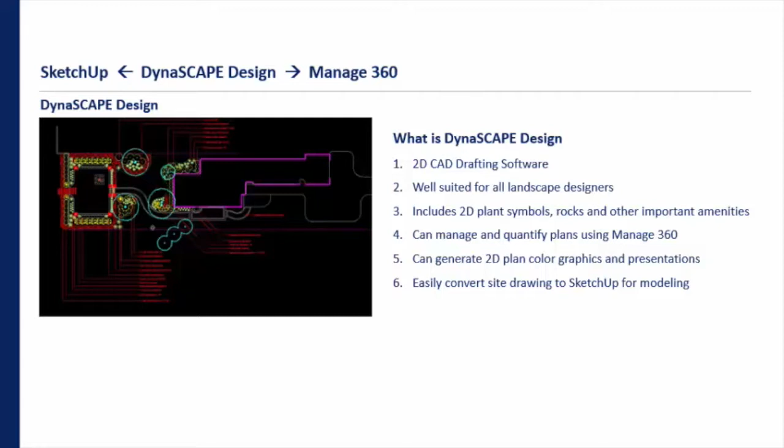And this is how you can quickly quantify and manage your plans to create all the different aspects in Manage 360, and easily convert that to SketchUp models.

So what is Manage 360? It's one of the business solutions that comes with it—a comprehensive business management software. Again, it's specific to the landscape design aspect of residential design, and it includes full sales pipeline management, which Patrick will touch upon in a lot of detail, and also cost-based estimating.

So it allows you, once you start drafting, to really start pulling out your estimating, quantities, and areas, generating those estimates and producing your reports using Manage 360. You can track your work orders, job progress, manage your timesheets, manage your employees, and analyze job profits and losses using the built-in best practices process that Manage 360 offers.

And of course, having SketchUp models coming out—for people in the audience interested in SketchUp and 3D modeling, that's an interesting topic. I talk with a lot of landscape designers and landscape architects doing residential design, and identifying that there's a need, especially for clients or to get ahead of the competition, in terms of using 3D modeling to portray your designs quickly and easily. And that's what SketchUp can do.

It's an easy program up front. There are some nuances to getting it to work for you in a much more proficient way, but it does have the ability to actually create models for you.

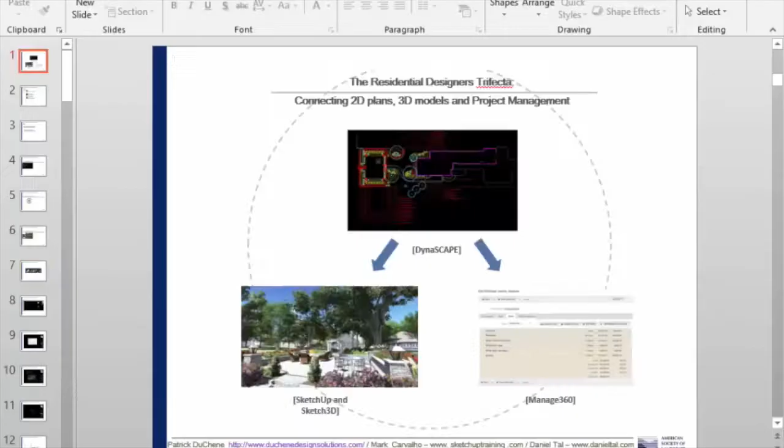Thanks. Hello, everybody. So, DynaSCAPE Software—some of you may recognize it, some of you may not. In the residential design build industry, it is an industry leader. It is a very dynamic software suite, really.

There are several components to it: DynaSCAPE Design, Color, Sketch 3D, and Manage 360, which makes it a very unique software tool for the industry. It allows you to not only design your projects, but to estimate your projects, propose your projects, manage your projects, and figure out at the end where you made your money and where you lost your money. So you can see why it's such a powerful tool in the design build industry, but it can be very well utilized in the landscape architecture industry, which DynaSCAPE is very excited to start becoming part of.

So DynaSCAPE Design, this is where it all starts. It's a CAD engine that runs very similar to AutoCAD. It can import AutoCAD drawings, and it can export as an AutoCAD drawing, DWG. So it plays very well with AutoCAD. If I'm sent an AutoCAD drawing, all the layers come with it. When I send a drawing to an engineer, an architect, or a landscape architect, all those layers go with it too. So it's a very seamless collaboration.

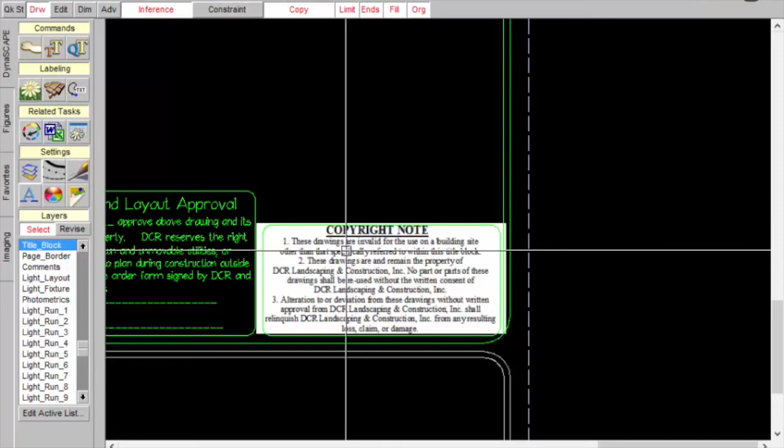So I've created what's called a prototype. A prototype is software that comes with title blocks. You can open a title block, insert logos, any information you want to come up every time you open a drawing, to reduce redundancy in your workflow. For this client, he wanted his certifications, his logos, a customer sign-off sheet for the drawing, which I always had clients sign off on so there's proof they even knew it existed, and a copyright note that says we own the drawing unless you pay for it. So hopefully everyone here is charging for their drawings.

So we can very quickly insert text: client name - let's see if I can spell my name right today - DuChene residence. As you can see, it's populating as I go. So, my address, Reddington Road. It's already set up to populate these. You don't have to; there is very, very little setup in DynaSCAPE.

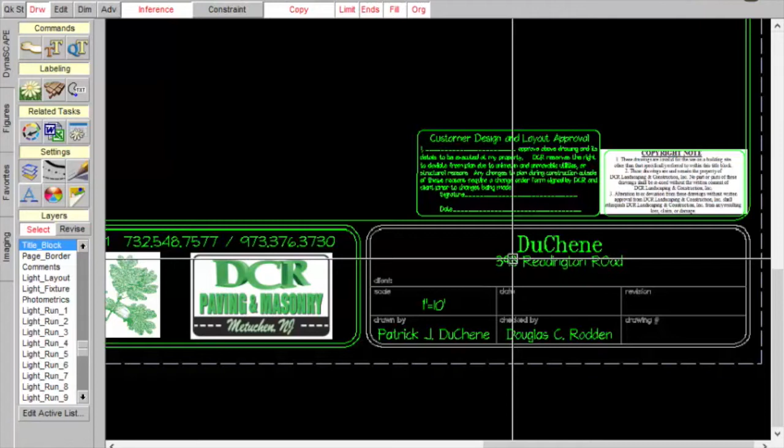Layers are set up already to industry standards. In 10 years of using it, I haven't thought once, 'I need to customize this,' because it's all done for you. If you want to customize, that's fine, but you have to decide how much your time is worth.

So here's the process. I open up my prototype. I have a survey from a client, so I bring in my survey from a well-organized file structure. Here's my survey - it's not to scale yet.

So I want to scale this so I can do one of two things. I can either do quick takeoffs to give a builder sod square footages, mulch takeoffs, or driveway square footage. I'm going to enter a dimension and insert it between this point and that point. So what I just told the software is that between those two points, it's 199 feet.

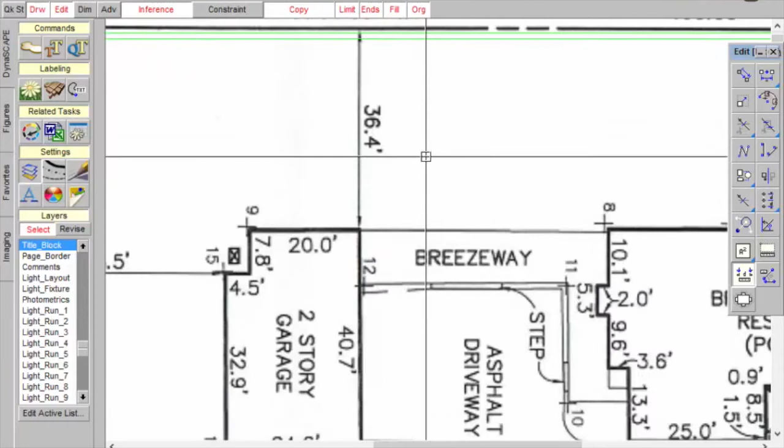If I did my job right, I'll test this to make sure I'm accurate. 36.4 - I'm close enough for presentation purposes, and we're not performing heart surgery. So my drawing is to scale. I'm going to save my drawing so I know where it is - we'll just put it on the desktop as presentation.

At this point I'll go into my layers. I'm going to select my building, just like you would in AutoCAD. Where's my drawing tool? Let's bring it back. I am going to trace everything on my survey that I want to keep. So if I'm not going to keep my walkway, I'm not going to trace it. I'll simplify this building.

So there's the house. We'll go through these steps and put everything on there that I want to keep. Then I will produce a base sheet for myself that looks like this.

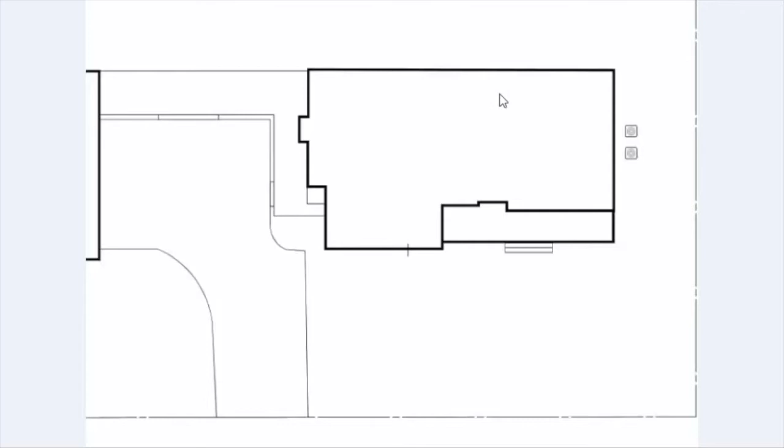Now, this is my workflow - I don't do it all the time, but it's a capability you can use. I'll print this out for myself and do a quick hand sketch with some basic things - I was trained by hand, which probably most everybody in this room was. That's how I get my ideas out quickest. So I'll doodle something, scan it in, and email it to a client to see if they think it's good, which puts me in the right direction.

If everything looks good, I'll bring this in. I'll make this invisible by turning it off, and I'll bring in my sketch. Here's my sketch. At this point, I'll just resize my sketch - I've done this enough to know that back wall is about 66 feet long.

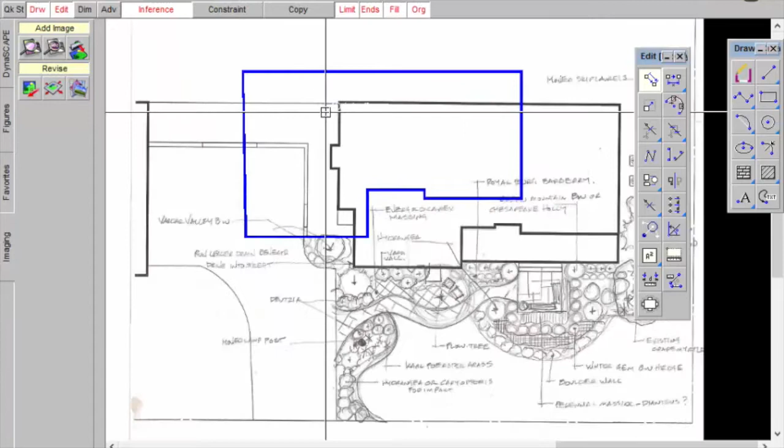So here is my dimensioned house. Now I can start tracing right over my plan. I'm going to trace - I'll float my house over. You can bring the paper into the sheet if you want, or you can do it outside the area. So I can just start tracing these.

Let's put in a couple of shrubs. This is a very dynamic component library - everything you can imagine is in here. Great graphic representation for shrubs, furniture, fireplaces, barbecues, ponds - an incredible amount of components for the landscape design industry.

But since there are a lot of them, you'll just decide which ones you like to use most, just like you would if you're designing in AutoCAD or whatever. So let's throw a few shrubs here - I'm going to cover this one with that figure right there. Let's make these some green velvet boxwoods, so maybe we can assign a 30-inch-wide growth habit.

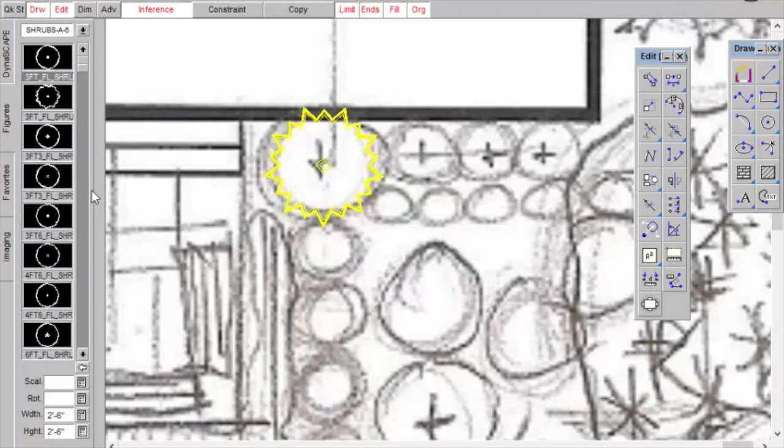Do this at 30 inches. We'll throw this in. They're all preset to sizes, but you can override them. And 99% of the time, that's what I do anyway, just because I really like to know that they're exactly what I want. So we'll bring this, we'll move that back over. Then you can really quickly copy this. Let's send some over here.

And let's throw in a tree. So we'll go to trees, shade tree, trees with no shade. Let's throw this one and let's give it a 15-foot canopy. So 15, 15. We'll throw this guy in here. And let's just give ourselves a square here, which I call the welcome court or the walkway entry.

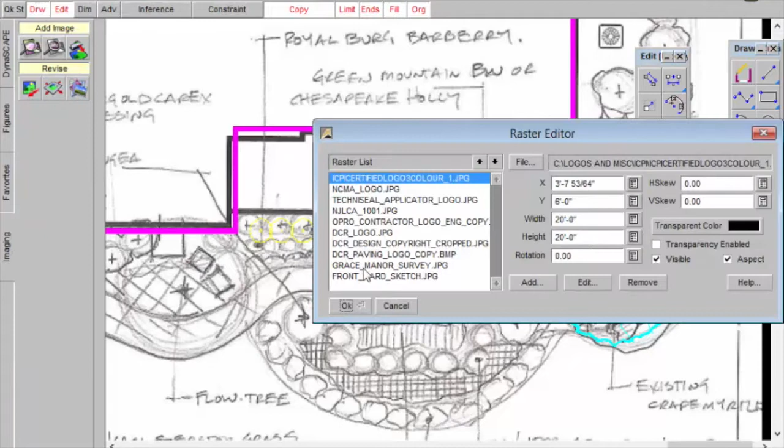Okay, so we have some components and an area that we could color, do takeoffs. So I'm going to make this go away now. And let's just slide this in here and start getting this ready to be a final drawing. So my porch disappeared steps, that's okay.

So now what I want to do is start preparing this drawing to estimate, to label. And if you don't, with the Manage 360 software... well, let's back up. Let's group all the plants together so when we count them, they are all going to populate and we get a good exact count. This is a really dynamic feature.

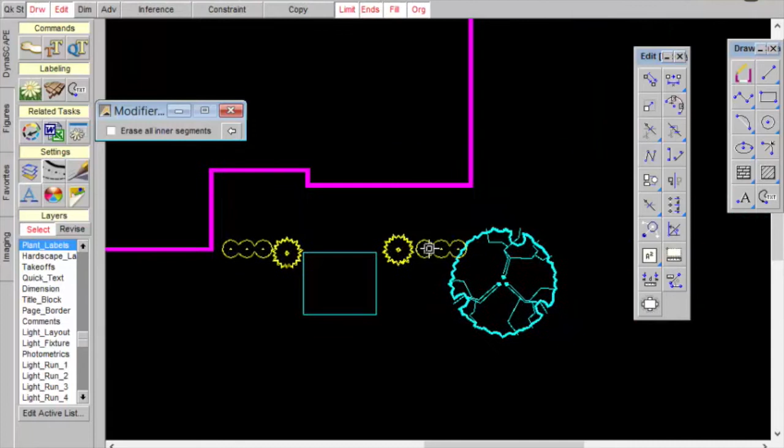So let's make these green velvet boxwood. So when I'm labeling in my plants, this could almost say Manage 360. So if I were estimating out of cost books, and I were to insert green velvet boxwoods, behind that word is going to be information that I've set in the background in the cost books, which would be, okay, a 24 to 30 inch winter gem, I'd probably put maybe 30 minutes of labor, $45 a piece.

So every boxwood that I estimate on my drawing, when it goes into Manage, all that's done for you. You're not counting. You're not goofing around with an Excel spreadsheet like I did for years. So we'll get into that in a little bit.

So without Manage, well, let's type in green velvet. It's going to find green velvet in this humongous database of plant material. It's normally much quicker than this, but we are dealing with a wireless hotspot.

Okay, let me try it one more time. Let's see if we can get to it. Okay, good. Okay, so there's my green velvet. So I'm going to click Go. So as soon as I click these shrubs, boom, they light up, and there are my 6 green velvet boxwoods.

Let's make these a Steeds holly. So let's type in steed. You don't have to type the whole name because it kind of thinks for you. Steed holly. 1, 2, a few clicks. If I want to really be nice and detailed, I run myself a nice guideline.

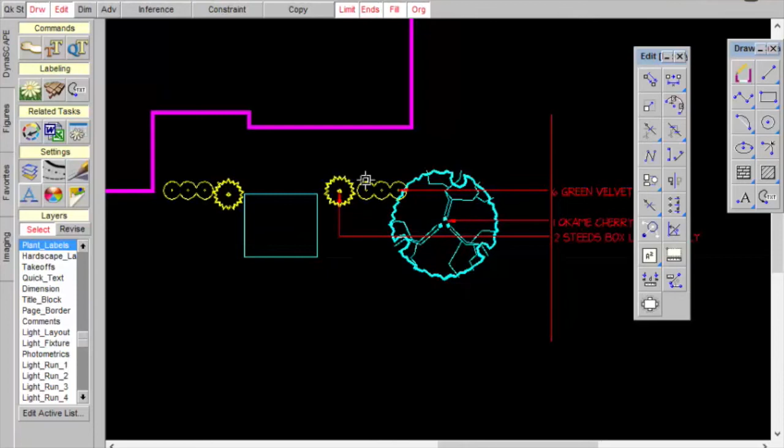Okay, let's make the tree an Okame cherry. Very quick. I didn't have to manually type anything in. The software counted everything. The only time it's going to make a mistake on the counting is if I didn't group things right, if I missed something. But that's why it flashes, so you can see if you missed something.

If you have a larger drawing, we're going to go through and insert all of our plant labels. Then, what do we like to do? We want to put a plant schedule on there. So how do we do that?

There's a really cool little button that says place a plant schedule. As soon as you click it, you can decide what you want to put in there. Botanical, common. I usually don't do botanical because my clients' homeowners' heads will explode if they try to even read botanical names. So let's just stick with common names, size, and quantity. Let's not worry about size right now. As soon as I click OK, you can see what this does.

The system already has default categories of the plant material, so I don't need to mess with that, unless there's marginal plants where it could be a ground cover or a perennial, and you can establish what that is. I'm going to click OK, and I just float this wherever I want. And there's my plant schedule. It's done. At this point, I can click this and export this plant list as an Excel file. You can send it off to your nursery for pricing.

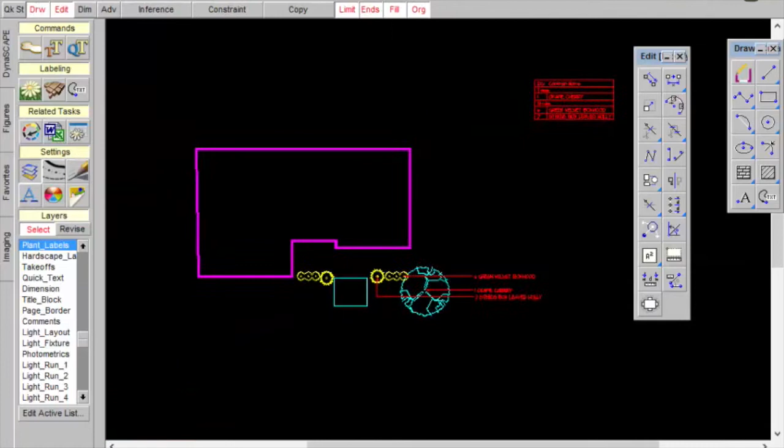So once this is all done, let's put some plant pictures in. So this is where this is not only design software, but I call it design and presentation software because you can really start doing some fun things with this.

So it has a very powerful capability to insert my plants. All I did was click one button, left click, and right click. So now the database is saying, okay, what picture do I have for green velvet boxwood? Or what's their picture that they've supplied?

Again, instantly it would come up, but we're under the mercy. Okay, let's try one more time because it seemed to work the first time. I did it twice.

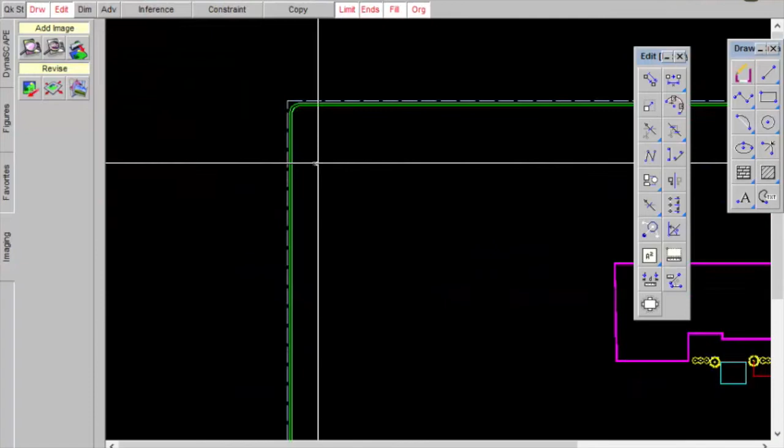Okay, so it doesn't want to cooperate right now, but here's what it will allow me to do. Oh, there it is. That's not a bad picture of a green velvet. So I'm going to insert my image right there. There's my picture with a nice frame with the wording.

If I want to bring in a picture of pavers, I can go into my drawing and insert pictures of pavers, irrigation heads, pergolas, anything you want to showcase, because when you go in for a sales presentation, the less cumbersome it is, the better. So the less stuff you bring with you, the more streamlined your presentation. When you can bring one sheet of paper that has your design, plan images, hardscape images, it's all there. You sit back, relax, let them digest it, and it really speaks for itself.

So we have a drawing now that's labeled plan images, plant schedule. From this point, we can go a couple different directions. If we're not going to estimate it, we'll take it into modeling. Or we can color it, or take it into manage.

But let's take this into DynaSCAPE Color. DynaSCAPE Color is a very easy program. My 6-year-old knows how to use it. Every plant is yellow in her drawings because that's her favorite color. So maybe when she's 8, we'll talk about color schemes.

So let's open that drawing that we just worked on. I'm going to click the button. Everything is great, you can hover over it and it tells you what it is. We're going to go to desktop, and I'm going to click presentation. So here's my black and white drawing as it is right here.

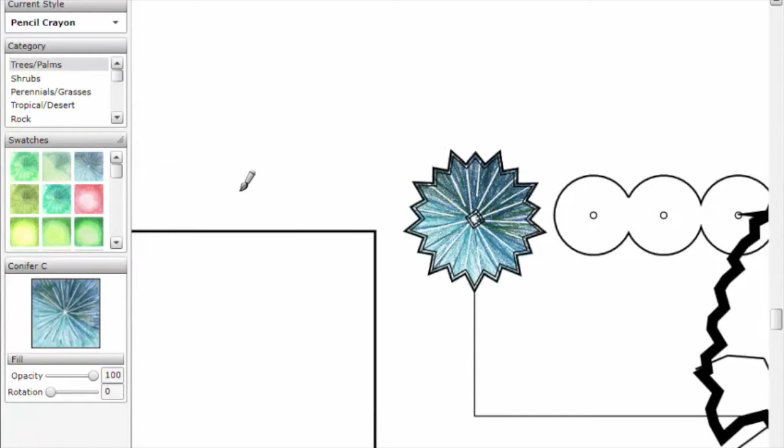Now it's click and color. There are some really neat styles. There's a pencil crayon style that, if you really like that hand look, can color something that looks really neat. I think they had somebody literally do this all by hand using those swatches, so it really is hand rendered.

Marker hybrid is my favorite, where it's a little bit of a mix. Or you can go with a really funky California style, which I've seen some neat drawings with these figures, but I just like to stick with marker hybrid. So just like in design, you're going to find those components that you like to use.

Same thing with color. Every time I do a green velvet or a winter gem, I like to use this right here. Okame cherry, I always like to use this right here. So I'll put this to the foreground.

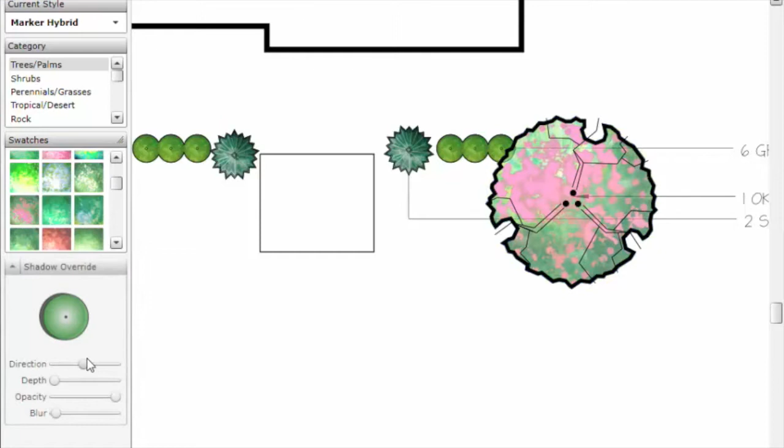Now you can do some really neat things with this. You can play with the opacity of this tree. You can assign shadow angles to your shrubs. I can play with the opacity and the blur, so I can really start giving some life to my drawing.

Let's color in the pavers. All of these are really nice swatches that have been made. There are some real nice paver swatches. You can make your own custom pavers. I made this for the Belgard rep yesterday. You can use that — that's Techo-Bloc, Shale Gray, Blue 60mm.

That's a really awesome way to show clients what Shale Gray will look like next to Harvest Gold, which is a really important thing to be able to convey to a customer.

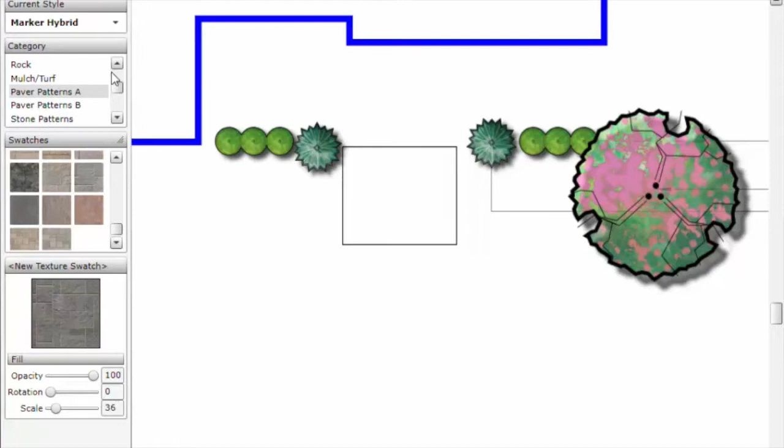Let's just use a DynaSCAPE pattern. Let's color with something like, these are the good ones right here. Let's do that pattern. I can rotate it, make it bigger or smaller. So let's just stick with that.

And my roof, I can either color it with a roof texture, or do something really nice and subtle, like just color it in like this, fade it to the background, and it's a really nice soft look where it doesn't overpower the drawing.

So let's just save this in case the power goes out — presentation, colored. Okay, it's going to save. This is just what happens at trade shows.

So let's start it back up. But it's not a problem. So here's my colored drawing.

All right, so now let's say they decide they want a screening hedge on the left side of the property. It's easy—let's just say maybe it's these trees. So let's scale this up and run a copy of these down.

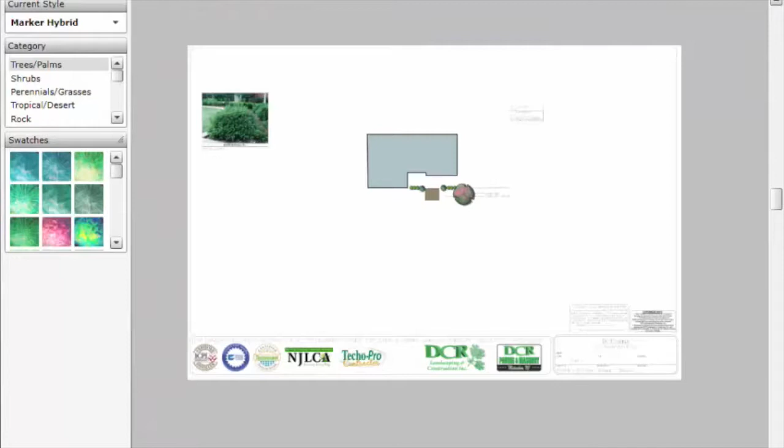This is really cool what I'm going to show you, because before this feature came out, you'd have to manually recolor a drawing every time there was a change. Now you don't have to. All you have to do is click Update Presentation, and it'll ask are you sure—I'll say yes.

And there are my trees. So anything you've added or subtracted—obviously if you subtract it, it's gone. But anything you add to the drawing comes in black and white, and anything that wasn't changed stays the same.

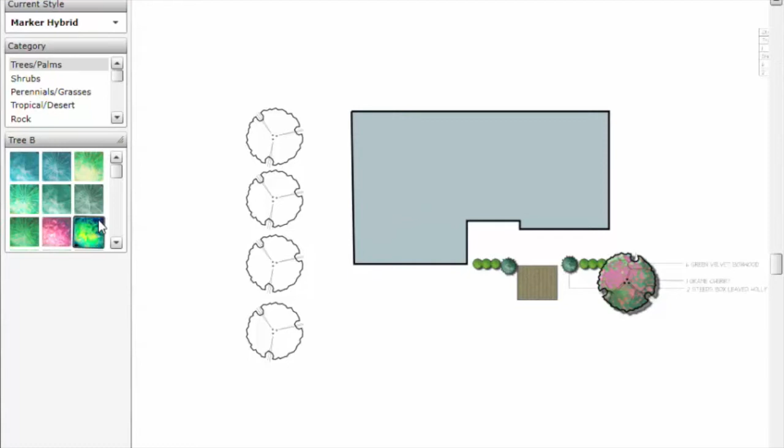So let's make a Japanese maple—that's what I use every time. Opacity, shadowing, whatever. You'll end up with a very nice color rendered drawing that I'll show you in the slideshow.

You can save this as a JPEG or a PDF to send off to a customer. Same thing with design—save it as a JPEG, PDF, or AutoCAD file.

That's color. Everybody here could probably open a drawing and color a drawing, hopefully. Okay, so we're finished with the color rendered drawing.

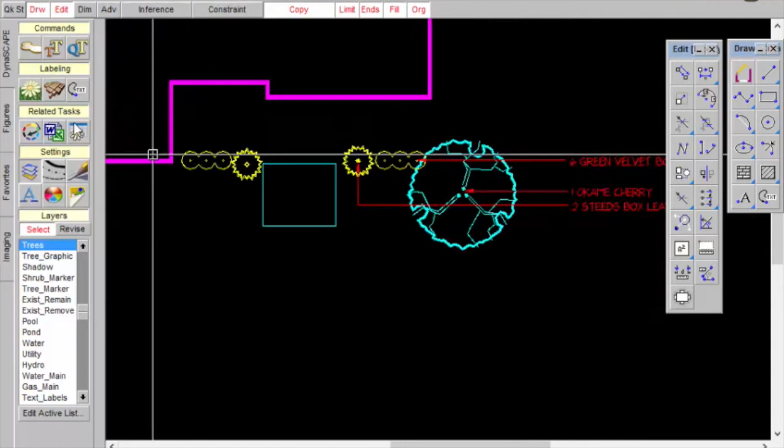That's good. Now we want to take this into DynaSCAPE Manage. Just for presentation purposes, you're also able to go in and start labeling this for hardscape as well, for pavers. So we're going to pretend these are all done out of our cost books, and we have some paver material in here, and some mulch square footages that you label.

Before you send this to Manage, we can set these into what are called work areas. This is crucial—this is a big deal, because when we estimate, most of us are estimating in an a la carte format, where we're giving the front foundation planting, back pool planting, right side screen, back patio, so we can break down prices. That's what a quotation group is, or this could also say work area.

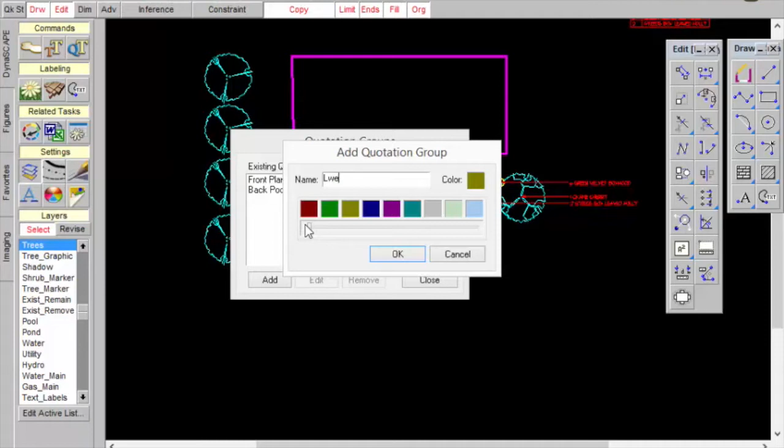So let's remove these and just put them into different work areas. I'm going to add front planting—it's automatically going to color code for me, so I don't need to select colors. I'm going to do back pool planting—this will make a lot of sense when we get into Manage. And let's do left side screening. Okay, now what do I want in my front planting?

Let's put green velvet—I'll left click, right click. It changed color. When you print this out, though, the line weight isn't going to change. It'll still print just fine, but in the program it'll still show in colors.

Back pool planting—let's pretend this is the back pool planting. Left side screening—let's pretend this is left side screening. Okay, we're good, we don't want to do any more. Close, save. All right, what have we just done?

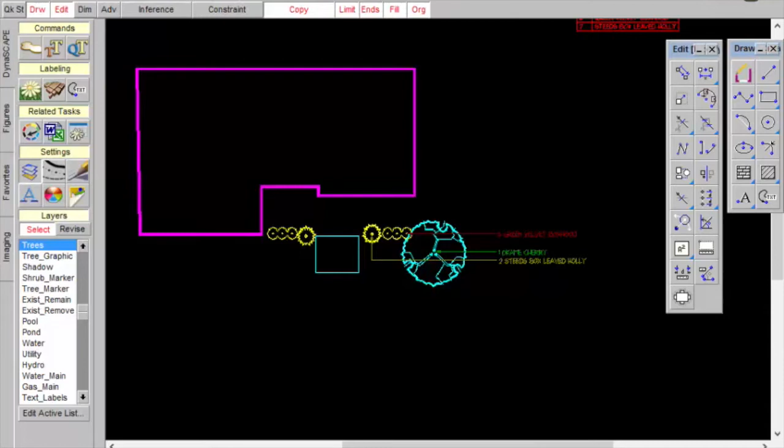What we've done is we've taken all of this information on a drawing—the plants, everything that goes into an estimate—and we've allocated it to a certain part of an estimate. So when that estimate is created, all those things go where they're supposed to go, and you're not having to manually put them there. So I'm going to recap this really quickly, and then we're going to jump into Manage.

So let's click here. Okay, prototype—insert your survey, import your AutoCAD survey if you want. You create your base sheet, print it out, sketch on it, bring it back into your drawing, or you can just get off to the races and start drawing.

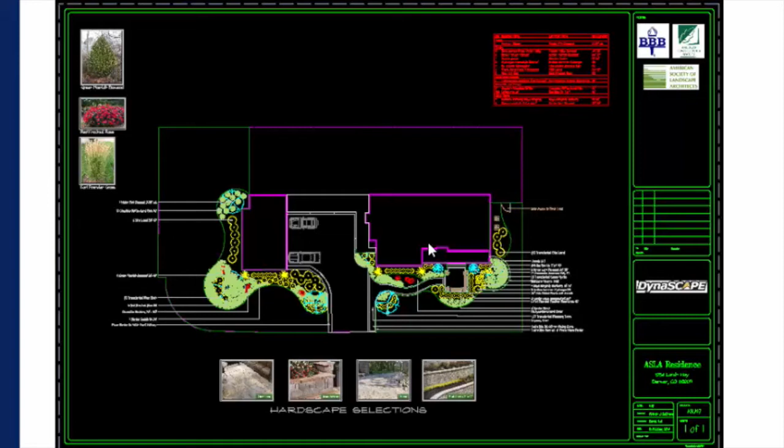There's what it's going to look like when we've done a nice overlay on our sketch. There's what it's going to look like after it's drafted—labeled plant schedule, some plant pictures. There are some hardscape selections there so the customer knows that when a label points to Minicrete or a 3-inch Techo-Bloc, they can follow the line and see exactly what everything looks like, and you're not bringing a bunch of catalogs. So we brought it into DynaSCAPE Color.

There's DynaSCAPE Color. Click and color. So there's a custom texture of pavers, and there's some royal burgundy barberries, which everybody's saying is invasive now, so I probably shouldn't say that word.

There is a final presentation, and I've started putting this kind of nice subtle color in the background because it seems to soften a drawing a little bit. That's my personal preference, obviously you do whatever you want. And there's a really nice close-up. So am I the best at coloring? No, but I think it conveys what I want to convey to a customer.

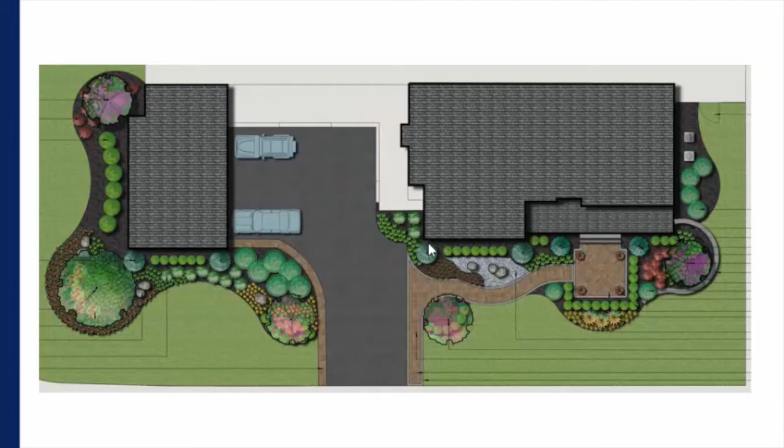In residential design build, clients really like to see what things look like. So if I can show them that the hypericum has yellow flowers and the Caesar's Brother Siberian iris has a bluish purple, I'm going to put those colors in there even though they're not flowering all the time. It really helps them see all the colors. They could care less what the plants look like, they just want nice, colorful, whatever. So it does its job successfully.

There's some flower pots with red flowers in it. So you can really get detailed, nice shadowing on the steps and the little retaining wall. This is a way sometimes to avoid getting into the modeling process when you can show them which way steps are going up and down.

There's our plant labeling with all kinds of different plant material, and there's our example of hardscape labeling out of Manage. So when you're in DynaSCAPE Design, you'll go File, Export, DynaSCAPE Manage File. What that does is bundle the drawing into a DMX file that has all the information for Manage 360.

So when the DynaSCAPE salespeople give demos online for clients, they can take a couple hours. It's an extremely dynamic software program. I don't have much more time to talk.

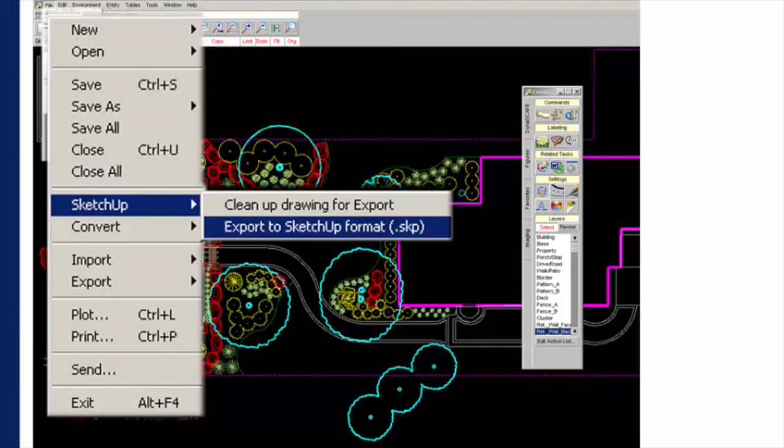I'm going to do this in two different ways, then hand it over to Mark, who'll talk about a couple other processes in terms of modeling. This is what it looks like in SketchUp—we've gone from DynaSCAPE, and it's opened automatically for you in SketchUp.

There's a couple of things that's important to note here. In DynaSCAPE, when Patrick was drafting everything - drawing building lines, fence lines, paving, plants - it's automatically populating all the individual elements onto layers, which is important when working with vegetation in 3D in SketchUp because you really want to control your vegetation layers, especially the geometry. I'll talk about that once you're in SketchUp.

Here you can see the layers in SketchUp open to the right, and the drawing itself imported in SketchUp. So you're looking in SketchUp at a plan view. You can turn off the vegetation layers, and what you really need to do to model in SketchUp is start creating surfaces, then extrude them, then apply colors to them.

The next step is using something DynaSCAPE has created - a CAD to SketchUp cleanup plugin. What it does is automatically create the faces for you from your 2D drawing. So that's the first part.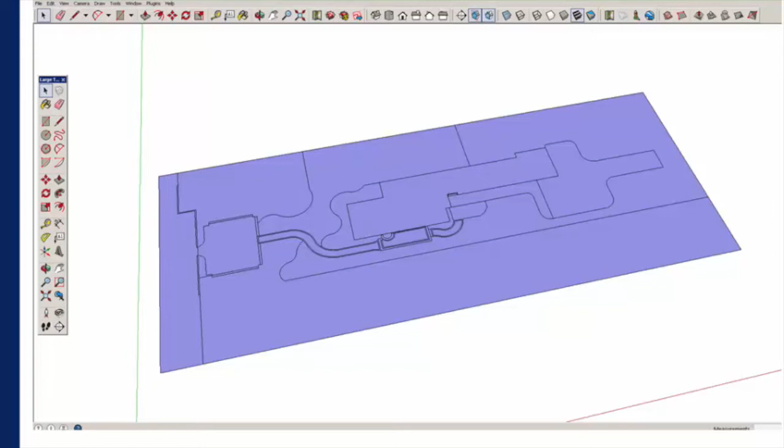Without the plugin, if you just imported the CAD line work and didn't have this extension - extensions are just apps for SketchUp, that's all they really are - it would take quite a good amount of time to actually create all the different surfaces and faces in SketchUp. This plugin automates the process for you.

Next step, similar to DynaSCAPE Color, you're using a paint bucket tool, applying colors to surfaces, indicating what the surfaces might be - from ground cover to lawn to hardscape to the building footprint itself. That's when you start using the tools in SketchUp to extrude volumes. We're not talking about terrain here - we will include terrain as part of this presentation, but here we're just talking about flat surfaces.

One thing worth noting: if you're using SketchUp for the first time, I always encourage people to go model a simple building or house. It was designed as an architectural program, and it's obviously been leveraged by just about every industry, from Cirque du Soleil to interior designers to landscape architecture and landscape design.

One of the things you're seeing, like DynaSCAPE itself, is it has all these preloaded native symbols you can already use for plants, for site furniture. SketchUp does as well, and we're going to talk about that in a couple levels of detail here.

Here the base plan is already modeled. We extruded the surface, we added some rocks to the front end. This was a project that Patrick and I actually worked on in tandem, in Michigan. At this point Patrick's become pretty proficient where he does all this modeling on his own as part of his own workflow.

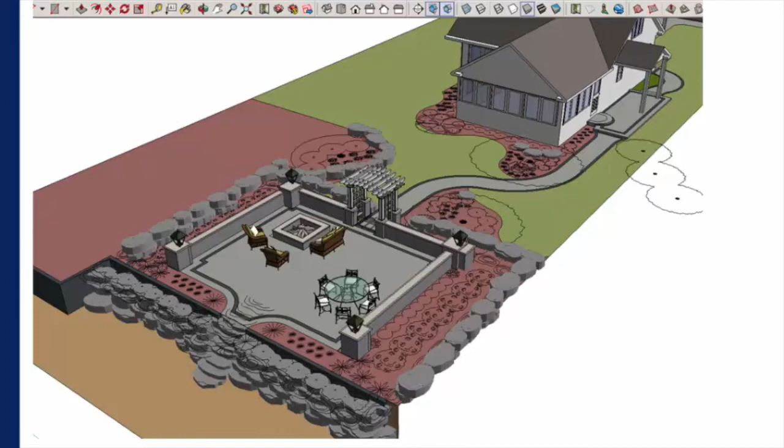Then we simply convert all the plants - you can see all the different plant symbols highlighted in the drawing. And then we're going to use something called Sketch 3D.

This is part of DynaSCAPE as well, another package that comes with DynaSCAPE, and it comes with over 1,100 different plant and components optimized for SketchUp use. The result is we have a planting plan with a rich amount of detail and information in it to give us a nice aesthetic drawing that you can start presenting to your clients. So you've leveraged your DynaSCAPE drawing and Sketch 3D with the SketchUp model to actually create this drawing.

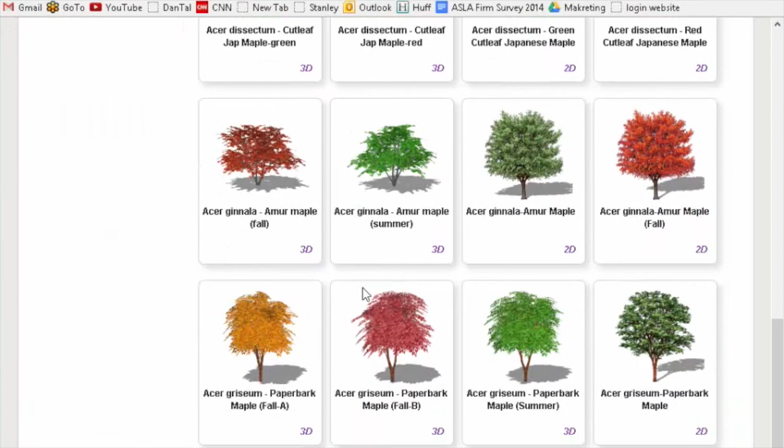I'm going to jump out of here and show you what Sketch 3D is. So this is the Sketch 3D site, on the DynaSCAPE site itself. On the left-hand side, you can see they've created and developed all these pre-made objects specific for SketchUp. This is part of the integration they've wanted to create, going from DynaSCAPE drawings into SketchUp itself. They have botanic names, and there's so many plants, grasses, perennials, different types of shrubs located on this particular list.

So if I go through perennials and grasses, you'll notice some of these have a name that says 2D or 3D. It's just telling you whether it's a 2D plant - and a 2D plant is a picture of the plant.

It's just a flat surface, and when you rotate in SketchUp, it actually follows the camera. Those are optimized, and they look really good when you start doing plant massings. A 3D plant is a fully articulated plant with all the geometry in it, and you can see they have shadows on some of them, giving a nice aesthetic quality.

It goes all the way from vines, water features, fencing. They've even added doors, fireplaces, different types of accessories. So it's a one-stop shop, and this is the difference.

In SketchUp, there's something called the 3D Warehouse, and that's a repository of millions of user-created models. The difference here is these are professionally created and optimized for your use with SketchUp, and obviously targeting the wine drinker community.

Just kidding there. It's just all the different types of vegetation that you can incorporate depending on your region or location. Obviously, when I'm working in Toronto, there's not a lot of palms, so this is very useful in terms of how that works.

Part of the Sketch 3D - so there's SketchUp, which is the software, and then there's Sketch 3D, which is just the name for this particular library that DynaSCAPE has developed. I just want to make that distinction because it can get confusing with all the Sketch and 3D, the DynaSCAPE color.

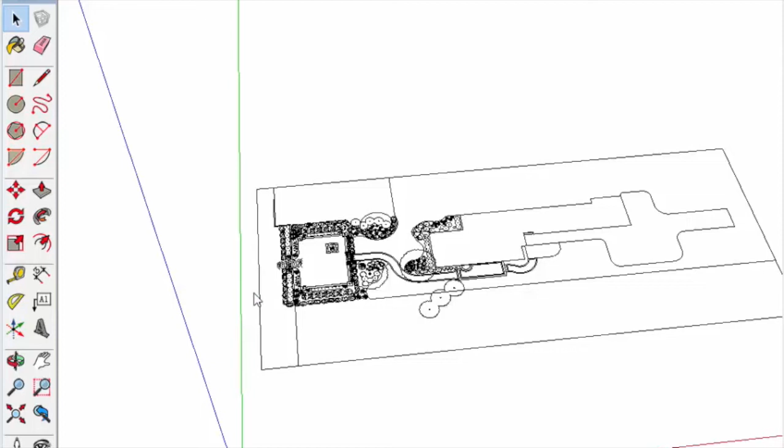So going into SketchUp itself - here's the SketchUp drawing that came in from DynaSCAPE. When you go through the import-export process from DynaSCAPE, it will ask you if you want to automatically open your DynaSCAPE drawing in SketchUp. Here you go, and you can see all the plant symbols and everything came in from DynaSCAPE into SketchUp.

Just to open up the layers - you're not actually creating these layers in DynaSCAPE. When you're drafting correctly in DynaSCAPE, it's automatically doing that for you, which makes it very efficient in SketchUp because you want the ability to manage and control all these layers. And you could start turning them off to actually get to the drawing lines themselves.

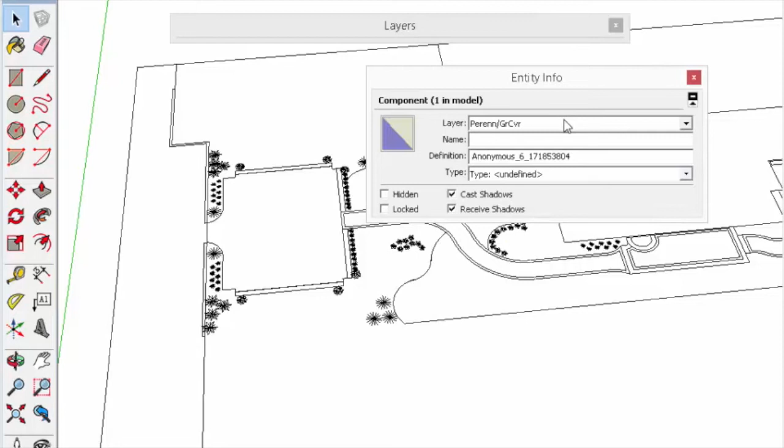Just going to quickly show you - you have some other information in SketchUp that lets you identify what these objects are, similar to what you can do in DynaSCAPE, leveraging that information. So it lets me turn that off, and now you can see I have my simple drawing and plan in SketchUp.

So the original way that you would create a model out of this drawing from an AutoCAD or DynaSCAPE plan is to start drawing all these additional lines to create faces. It starts getting a little painful if you're doing this process in an unformatted way. It would actually take me probably an hour, maybe a couple hours, to create all these faces.

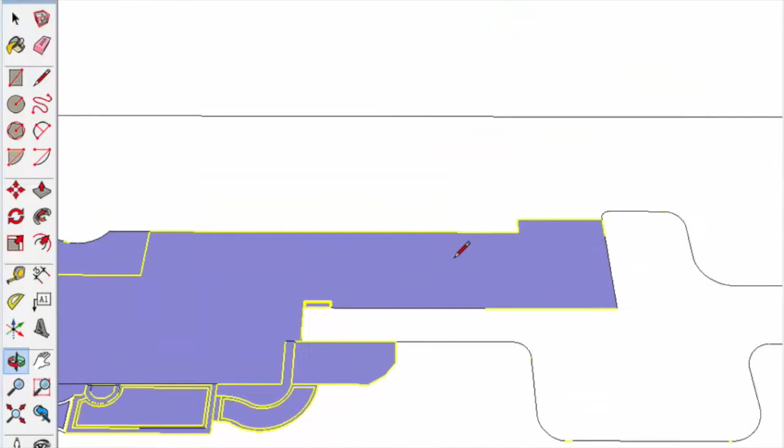I'm going to click on DynaSCAPE Tools, run CAD Cleanup, and what it's actually doing for me is cleaning up the drawing. Sometimes it's not perfect - you do have to go in and start cleaning it up a little bit more.

I was told if I was to demonstrate this entire process, I'm boring, so I'm not actually going to do every aspect of it here. I'm going to go on to the next drawing. It doesn't take long to actually fix this process, and this is part of the educational process of using SketchUp. Instead, I have all these pre-made drawings here, very simple in SketchUp.

You can take the paint bucket tool. This is the large tool set on SketchUp. And just as a note, if you're coming to SketchUp for the first time, these are most of the tools that come with SketchUp out of the box as a native tool. One of them is the paint bucket menu.

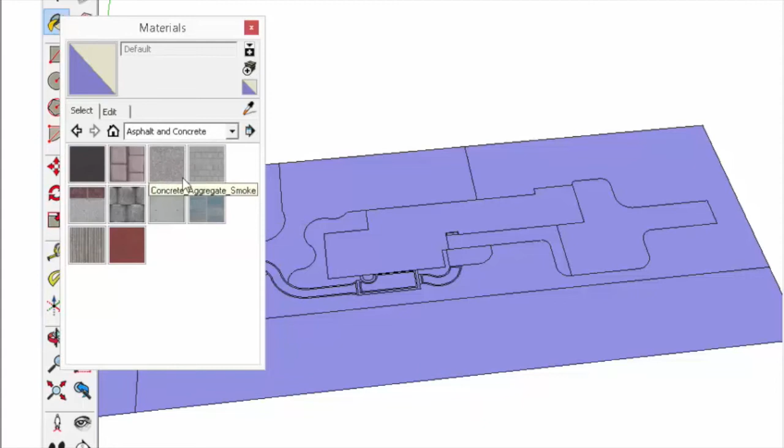I can start going through a materials menu here. I can select from predetermined colors and objects, again, similar to DynaSCAPE color. So in this case, I might select asphalt and concrete and start applying those colors.

And hopefully I'm doing this correctly. This was Patrick's plan, and they can be hard to interpret. Just kidding. He's like, thanks.

And apply these colors all the way around to what you need. And then the next thing you'll start doing is actually starting to extrude all the different surfaces to create your objects that you want to in SketchUp.

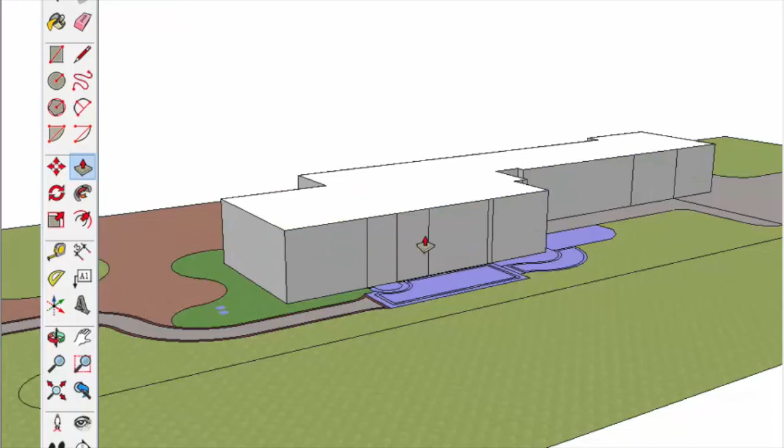So for example, here's my building. I'm going to extrude it up 10 feet. So that's using the push-pull tool, very simple to do. And for a lot of cases, you don't need to create a fully articulated actual drawing to the fullest accuracy that you want. So there's other plugins that you can use.

This one's called Instant Roof. I can select my roof, and this is an extension that doesn't come with SketchUp per se, but that you can go obtain. And I can quickly select from a predetermined number of roof styles. I'm going to select one called Hacienda, click on Make Roof, and it will automatically generate the roof for me.

I can even go in there and add another level of detail to this. Adding the detail. And this is part of the automated process of working in SketchUp to work with it in an efficient manner. So that's really the general purpose of how you're working with SketchUp.

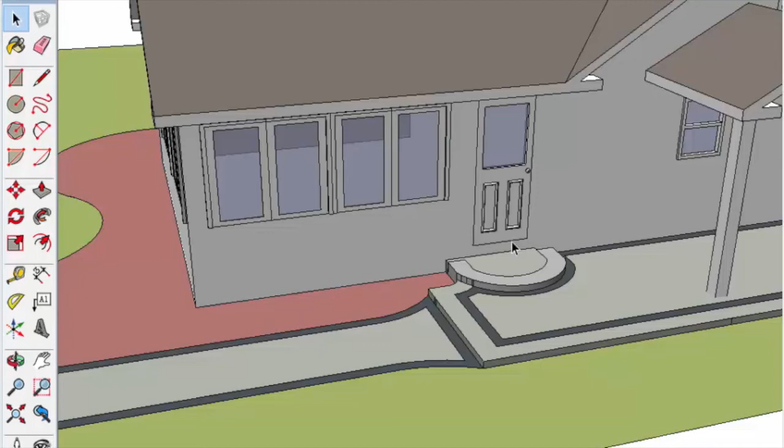I'm going to show a couple of more drawings here. So here we have the next set, the next iteration. The building is done. We've started to extrude the walls. We have all the colors inputted and placed on all the different surfaces. Our steps, again, we're not talking about terrain here, but you can do terrain modeling in SketchUp, and there's a couple of different ways to do that, and Mark will actually demonstrate that in more detail.

And then the next step is adding the next level of detail. And what I tend to do when I go through this workflow process, I do the vegetation last. That's the part that might be changed, while the hardscape is really the part that you need to get nailed down first. It's going to be the part that's the most unmovable, versus the vegetation and some of the stonework and rocks that you're going to put in and add later.

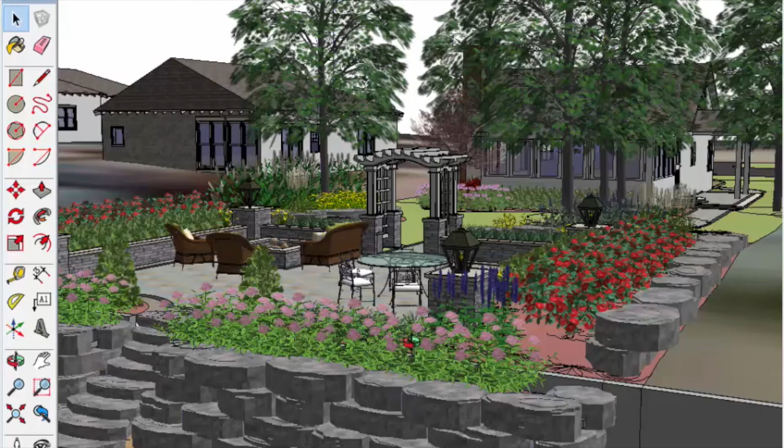So you can see I have all my furnishings, and again, everything is still tied into this layer system in SketchUp that allows you to control and manage how it looks. And then the last drawing really is once you have all the vegetation added in SketchUp, you have your completed drawing. And that's really the general process.

Now, one thing to note, why I use layers in SketchUp, and this is just an important thing if you get into this process, with all this vegetation visible in the model, SketchUp starts to slow down a little bit. That's when you can start turning off all the plant layers, and SketchUp will speed back up. And there's a workflow and process here that's useful in terms of how this can work.

And ultimately what it means is, once you have all your vegetation in there, you start exporting your images, and then you turn your layers back off. And that's really, in a nutshell, this is the general purpose and how you can use SketchUp.

I'm going to turn this over to Mark. I'll switch seats with you, and Mark will go through additional information about how SketchUp works. Okay.

Right, is my microphone loud enough?

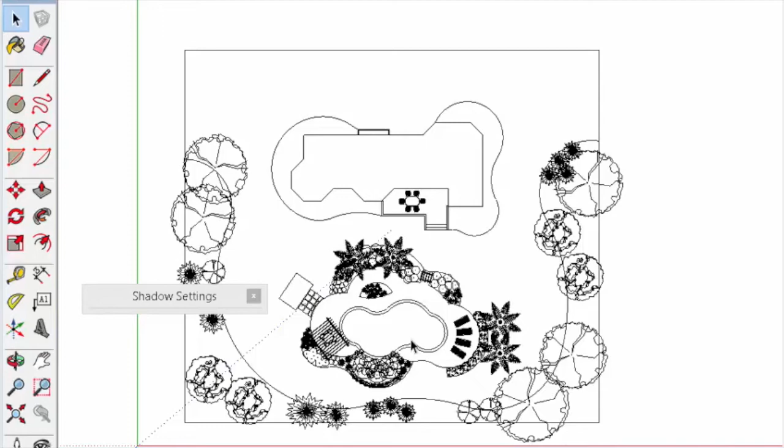I'll just touch on some of the things Daniel said. Here's an example of another plan. The line work comes in from DynaSCAPE - it's actually 3D, you can orbit, but right now it's just line work. Let's look at other things we can do with SketchUp to improve our communication of our DynaSCAPE design. Here's an example of using it as just a plan view with notations.

In SketchUp, you can notate your plant materials as well. It's going to list them by name of the component. What do you call them in DynaSCAPE? Figures - so it lists the figure by its name. They're called components in SketchUp. I've added shadowing to it, so you can turn it on or off. Really all that is a cheap little parlor trick, and I'll show it to you.

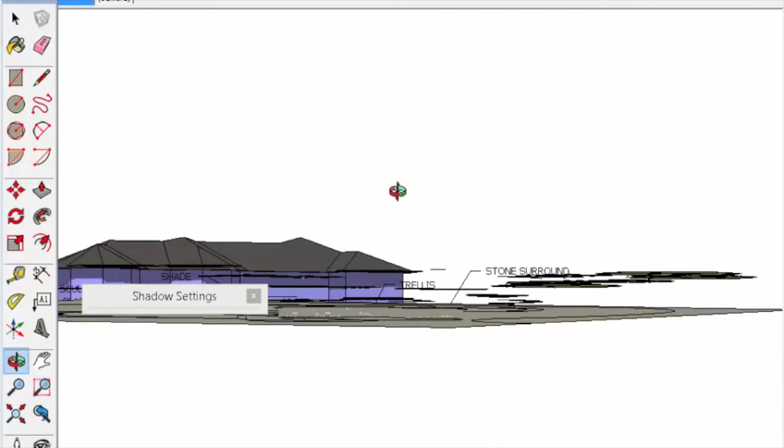Here's an example of using it as a colorized version. This is just SketchUp, so it's a different form of colorization than DynaSCAPE color. What I did was bring in each of the DynaSCAPE symbols, put faces to them, and colorized them. The shadowing, if I turn it off and on, is really just a parlor trick. They're still 2D images, floating above the plane, and the height you give it gives you the depth of the shadow you'll see. So that's a way to play with the concept of 3D using 2D, if you will.

Daniel talked about how these symbols are directly out of DynaSCAPE. I'll right click and reload one of them. So there's the king palm, for example. You can take the 2D file and turn it into 3D very quickly. So you can mix and match.

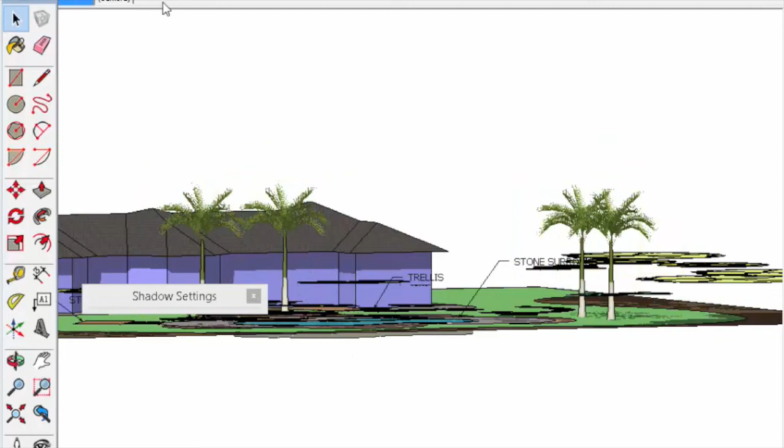We'll take these and drop them down onto the surface, then go back to the top view - our shadows are still on, and they look a little more realistic with the trees. So you can mix and match 3D trees and 2D trees to get the effect that you want. That's one game we can play with DynaSCAPE output.

Let's look at some other stuff. So this same backyard - I'll show you the finished example of it. Colorizing everything, painting it with the paint bucket, as Daniel did. You can save different scenes - the scenes are nothing more than a location and a camera position with layer settings.

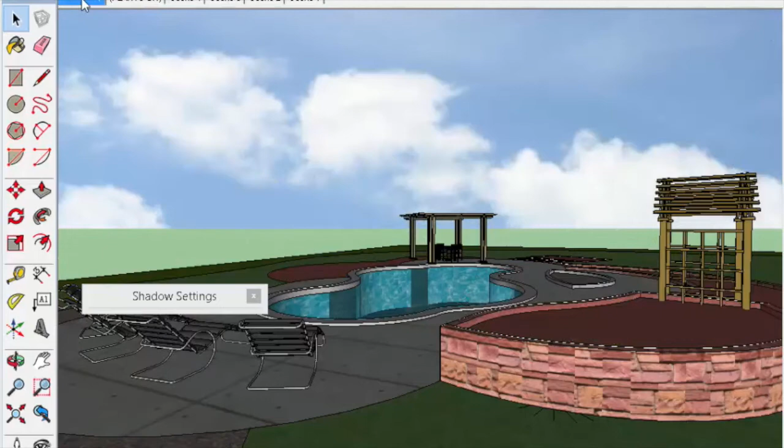So I turned on the plants. I can turn them off or on. If we turn them off, you can move around - it's a real 3D environment, a virtual 3D environment.

We can go back, turn the plants on or off, review the design with the client, and actually make walkthroughs. You can store this as a movie file or just do it in person. I prefer the in-person part because at any point, if they say 'I don't quite understand,' you can back up with your mouse or orbit and look from a different vantage point. So it's live.

While you're in the model, you can also drop a sky in the background, for example. This can be saved to a MOV or AVI file and then posted on a website, sent to them, or played in your meeting.

We could also turn the shadows on to give it some added depth and feeling. The shadows take a little more processing time as you work with it, especially with all the leaves like Daniel was talking about - models can become very heavy. So just be careful as you're working. I don't work with shadows on, in other words - I just turn them on when I'm finished.

Let's look at the shadow settings here. Right now you see some green across the pool - that's just a default ground plane. So you turn that off, and that corrects this image.

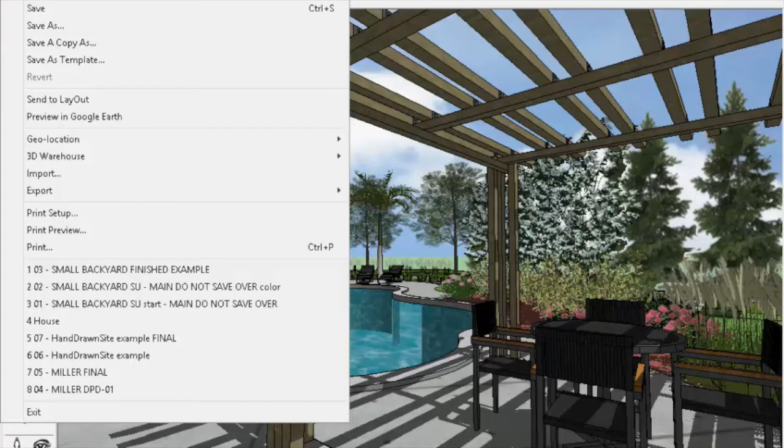So you could have the shadows on and save that as a movie, and you'll actually be walking through shaded portions of your drawing, your design, to show the client. That's an example, start to finish, of different ways of colorizing it, different ways of using line work, deciding whether you want to do DynaSCAPE Color, SketchUp, or a little bit of both.

Let's look at some other samples. Here's an example of another backyard, as it comes in from DynaSCAPE - just a 2D file with groupings and plants that came directly across, with layering from DynaSCAPE.

How do I dock this? There we go, is that all right? You just screwed up your machine. That's all right - this is the better way to work, Daniel.

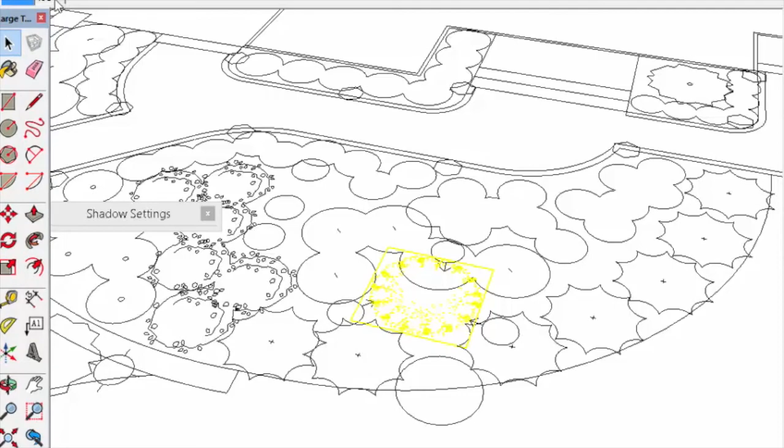So this is an example of bringing in a terrain surface and then working from the 2D onto that surface. I'll get into how this arrived and how the magic of that happened, but I wanted to show you how DynaSCAPE treats these materials.

So they all come across as components or figures. I'm going to take these and just right click and say drop them onto the surface below. So now it's taken all those 2D symbols and they follow the terrain now. We're starting to really immerse ourselves in this as if it were a three-dimensional real yard.

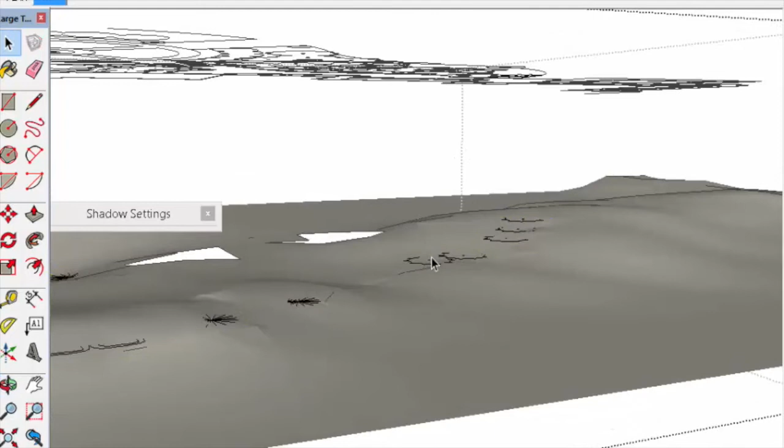And then we can do the same thing. We'll just reload those, maybe reload them as a dogwood. These are just DynaSCAPE from Sketch 3D, so I didn't have to draw them. Saves you a ton of time, well worth it. So reload another plant in here.

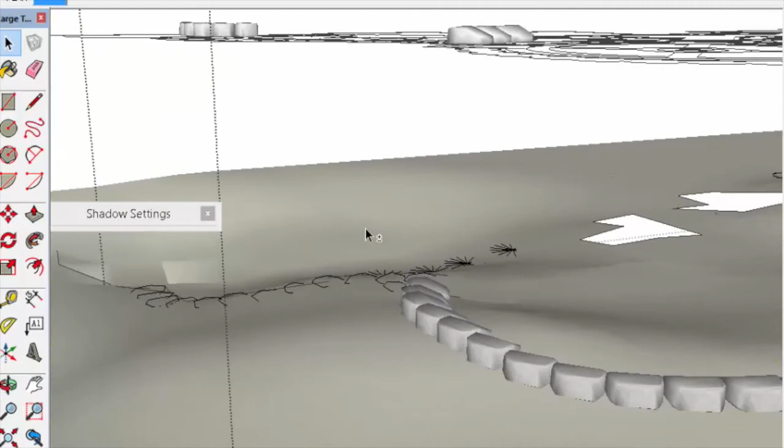So now you're really getting a sense of how this backyard would be in 3D. That's an example of just working from the two-dimensional line work. Let's look at what else we can do with it.

Now this will hopefully intrigue you. In SketchUp, you can take photographs and actually model from the photograph. So here's a photograph in the background, but all that geometry was created by using that photograph. All you do is line the photo up to the SketchUp axes, and then you model it in, but it's actually in 3D.

That process works really well, and you can end up with a lot of geometry very quickly that's actually very close to real. Depending on your accuracy as you're doing it, it'll be very close to real.

So we add in the hardscape, as Daniel said, but then you can take and colorize it. You saw the paint bucket. Well, with SketchUp, you can also take the photograph and treat it as a paint, and it can be applied to the model.

So this is an example of some colorization, but also the photograph. When you come in here, we've added a huge richness to this model with no overhead of geometry because it's all just part of the photograph.

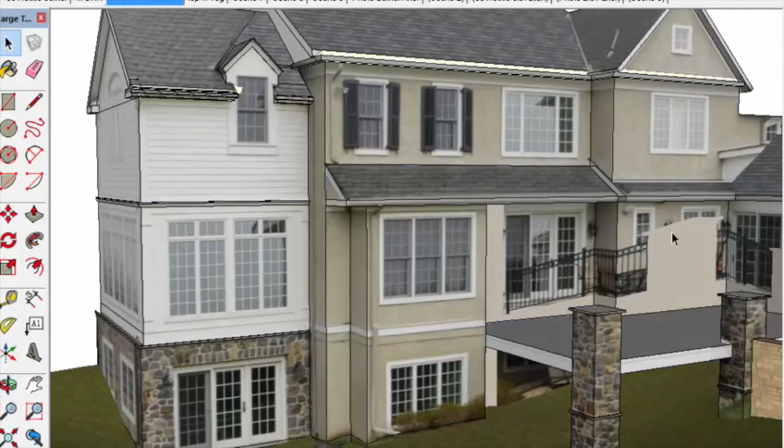Notice there are some areas over here that don't match the photograph. That's because this photograph's only good from one direction. It's a two-dimensional photograph. But if you're careful and you make solid colors that will not distract the client...

I could have gone a little darker. Then you can actually talk about your plantings, that's what you're really in business for, and not the house. So the hardscape would be all your new stuff, and then you'd add your plants in.

So we add those in from the top view, and it also adds a sense of depth if you turn the shadows on. I've assigned the shadow setting to just a hotkey so I can turn them on and off quickly. That gives a little more sense of depth and reality.

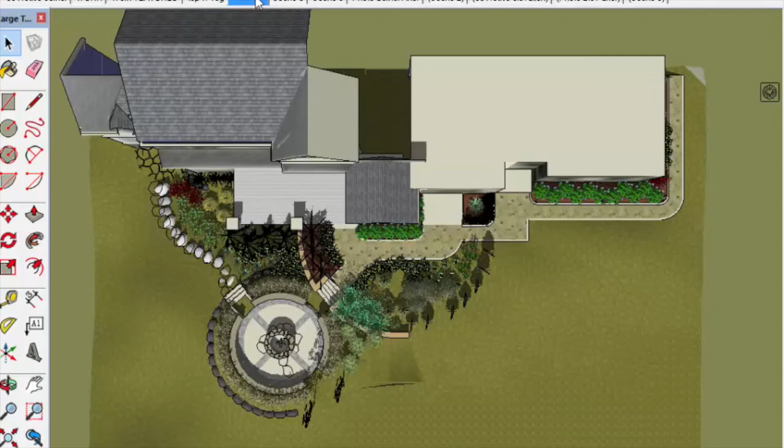So this is a plan view of a 3D surface. Now we're starting to introduce 2D. You could take 2D figures and combine that with the 3D if you wanted to. So now you can discuss with your client the backyard in more detail because it's real.

You can zoom in and out, you can take it from any direction. They get a good sense of how everything's affected as they move through it. So given the number of polygons of all these leaves, we're still moving along pretty well.

This gives you a sense of the quality of some 2D trees. Those are ones I made, and then the nicer stuff that you get from DynaSCAPE.

And you can immerse yourself even further and actually get down at the ground level and look at it, experiencing the design as if you're standing on the site. So you can specify that height of where you're standing. I think the shadows are on here, we'll let it turn on.

Daniel told me this was fast.

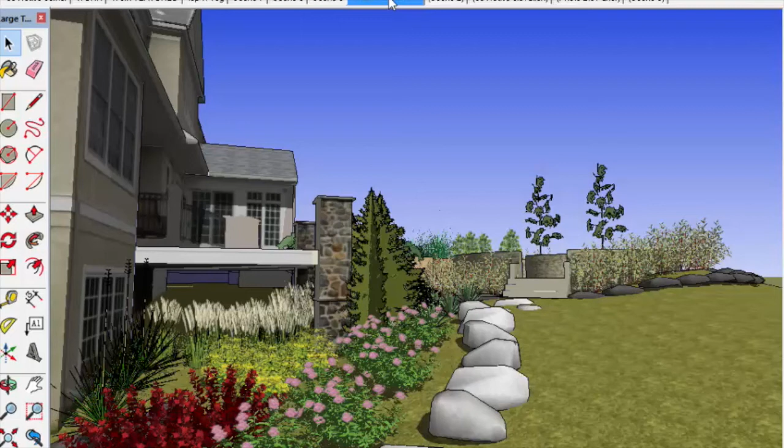So let's go back. The neat thing is we've got it all in. We've got the plants in 3D, and we've adjusted them. Remember, we started from a photograph. The neat thing is you can take that same photograph, and if you've been careful about the photograph you choose, you can actually use that as a background. Once we spin around and reorient the model to that background, we can use the photograph as our paint in the background, so we don't have just a generic sky. We'll have a more realistic look to it in a second.

So you can see that we're using the photograph. We get the haze, we get the neighbor's house, the whole bit. It really starts looking real, and then the foreground grass from the photograph merges into fake grass because of all this terrain we've created and added. If we turn off the edges, it'll soften it even further. This image can now be printed out and sent to the client. You get a very nice soft look, and it almost looks photographic to what you're wanting to show them. So that's one way to use SketchUp from a photograph.

I'm going to show you another thing we can do with it. We did that one, and I got to thinking, how much can we do with SketchUp? So I went on the web and just looked under landscape architecture and found a colored site plan. If this is yours, I would give you credit now—you can stand up, because I have no idea. I just found it on the web and thought, what can we play with?

So you start tracing it, tracing right over it onto a surface, and it creates line work and surfaces that you can then paint. After we get it all painted...

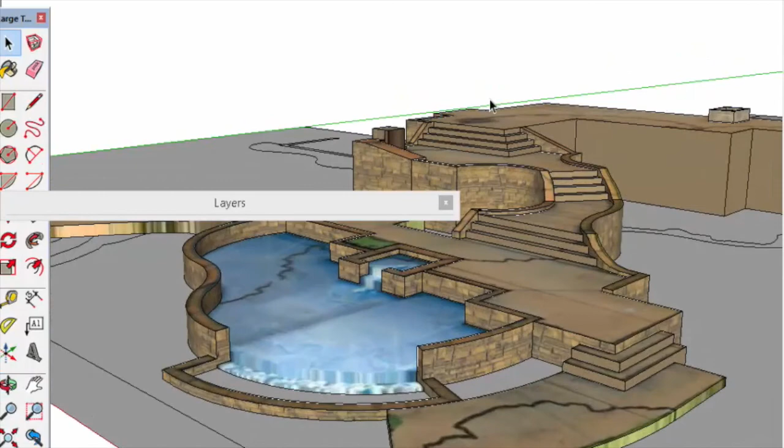We can start working with the walls and the walks. Now we've got it into 3D and we're actually experiencing this as a three-dimensional height as we work on the site. You do the hardscape first and then draw the landscape into it, believe it or not—I'll show you how to do that in a second. I'll turn the terrain on and you can see I took the terrain, made it 3D, and then painted the hand rendering right onto it.

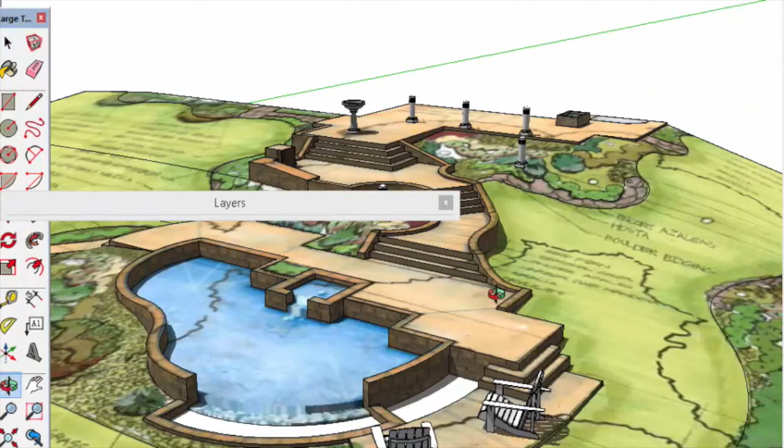So now we're cooking with gas. You can use your hand skills and add them to 3D, and now it's your presentation—it's no longer generic, it's the flavor of your own hand-drawn stuff. I'll turn on some accessories and just show you—you start adding the pieces and parts in, turn shadows on, and that adds another sense of reality to it.

So I'm going to come back to this in a minute, but let's talk a little bit more about how we do the terrain. Everybody's worked with contours, right?

You usually get that from a CAD source, possibly. Try to shrink this baby up. So this is just line work from a CAD source—in this case, they already had elevation. So all we need to do is make sure we have our toolbar on.

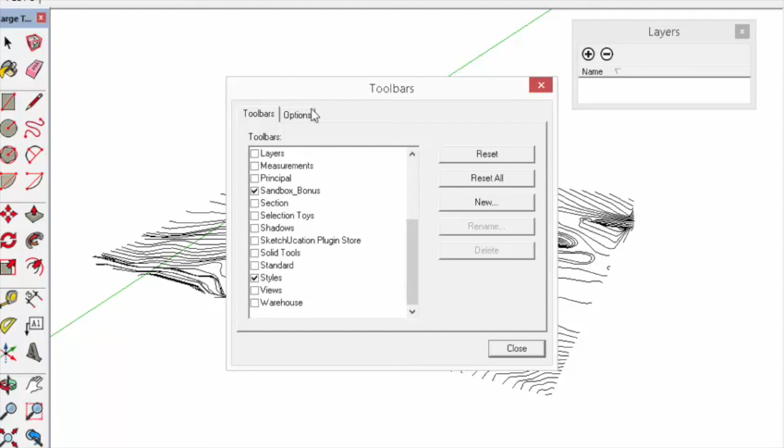Yeah, where are we? Oh, it's totally off? Go to extensions, window, extensions—sorry, technical difficulties. All right, pretend like none of that happened. So where are they?

Okay, so we can just select all these lines and ask SketchUp to give us a surface that represents those lines. What it's doing is reading all the vertices and creating a surface for us. So this surface is 3D, but all the points are coming directly from that input.

But now within SketchUp, we can play with that further. There's what we call a Smoove tool, and we'll just set it to 100 feet. What happened to this really fast computer? She thought we were using it wrong.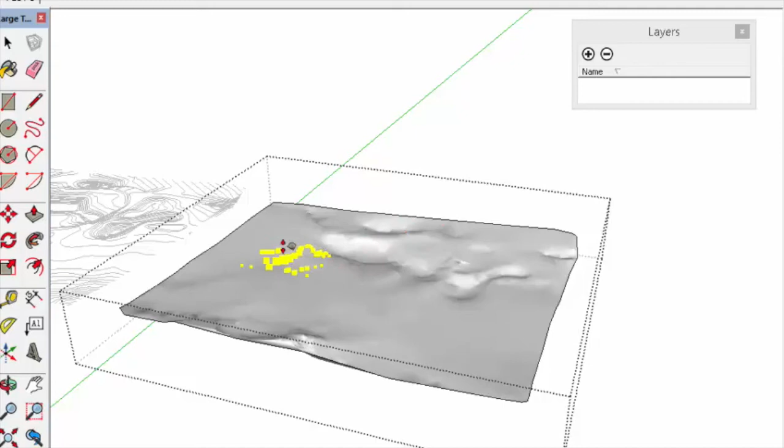So we can click on this, and what it does is allow you to adjust this terrain as if it were a single surface. I'm just exaggerating it to show you, but then we double click and we can go around and model and change this terrain—we can even push it downwards. So once you have the terrain, you can still play with it, and all those changes will react as you drape your paint onto it, so it'll still look like your hand rendering, but it'll be a steeper hillside.

So let's look at how that works. Quite often you will not... okay.

Here's your views, come on. Don't you use standard views, Daniel? Right click on the top views. Okay.

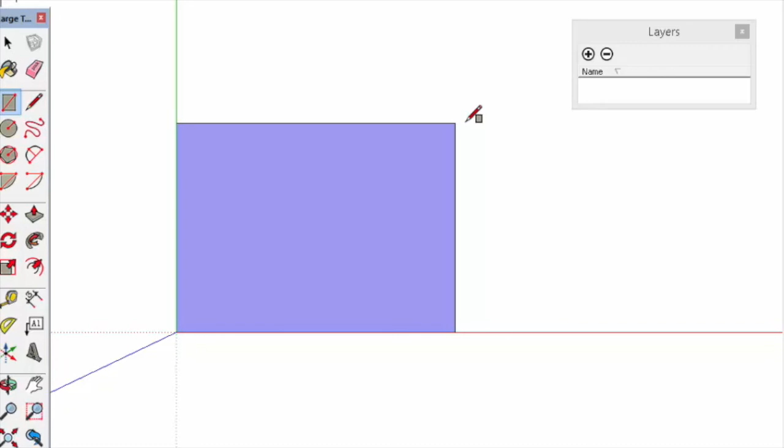Quite often you'll have to generate your own diagrams. So let's draw a 125 foot by 75 foot rectangle just to have a sense of scale.

You'll know from the client meeting how the terrain is, so you just rough it in. If you've taken spot elevations, use them. But I'm just going to rough in some terrain here.

Using push-pull, you simply give it a stepped model and work from there. But that's a little bit cumbersome, so there are some plugins that help with that. This is a foam core plugin.

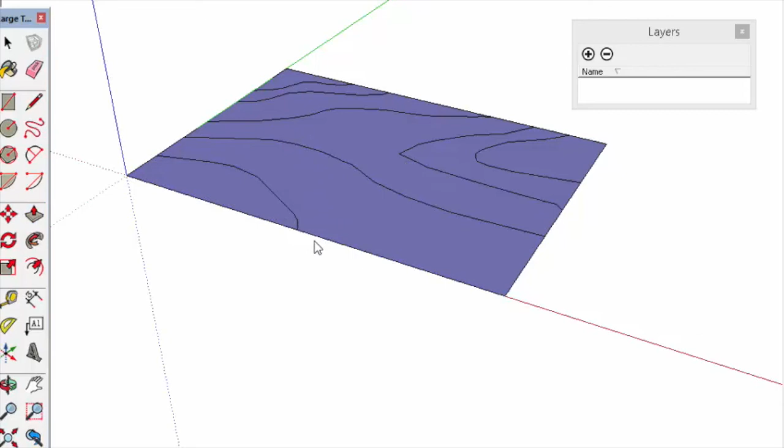We'll tell it we want 24-inch spacing, and now as you click it, you just keep clicking and it keeps incrementing it upwards, so you can create your stepped model very quickly.

Then I'll pull these up, and we'll use it in reverse. We'll tell it minus 24, and now it'll decrement. It's supposed to. Minus 24, and now it'll go down.

Once you've got it set up, you just select it all and ask SketchUp to give you a surface from that. That surface is a real 3D surface, and you can adjust it from there.

If you want to play with it again, we'll make it 15 feet. Let's say we change this and modify it. Once you've modified it, you can take that surface and send it to another plugin that'll recreate the contours for you.

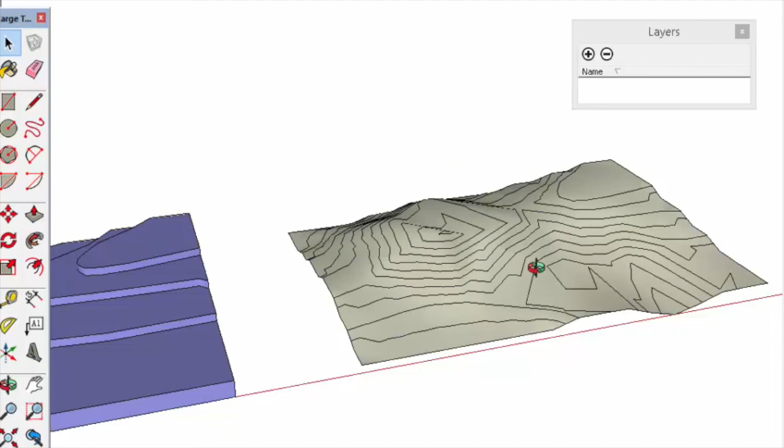We'll do it as 12-inch contours. And there's your contours. If we hold that over the original, you can see where you've actually changed it and increased the height. These contours can now be sent to your engineer for grading plans and work it from there.

I think I'm running out of time, so let's just look at that last one. Oh, do I still have 10? Oh great, sorry, okay, so there's one more thing I wanted to show you.

Okay, so we'll bring in, say, a house. Uh-oh, where's our stuff? Get me to it. Where are we? Whoops, sorry. That's okay, we won't do the house part, we'll just draw. Okay, I'm off here, let's try something else. That's okay. You're done with one, yeah I got it. Just have to. There we go, okay, sorry about that.

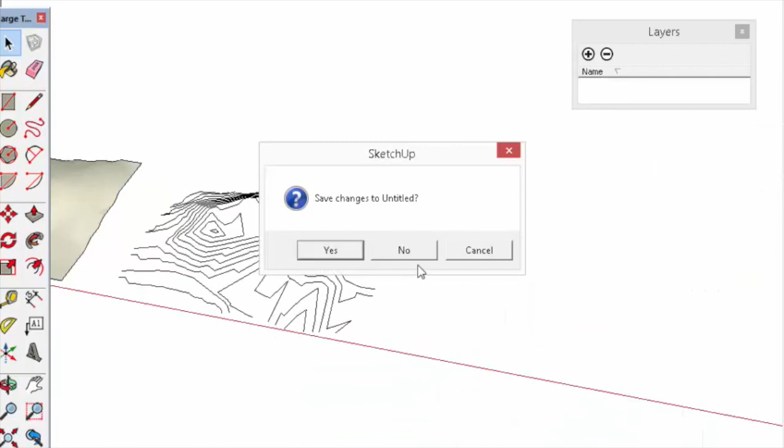That's okay, we'll do this one instead. So here's an example of a simple pathway. Let's create some terrain from that. I'll just copy it up in the air, and I'm going to push-pull these walls up about the same amount, because we're going to create it above that.

On the wall behind, I can just draw the shape of how the ground hits that wall in the background. Then select that and select my edge here, and ask SketchUp to give me a surface between them.

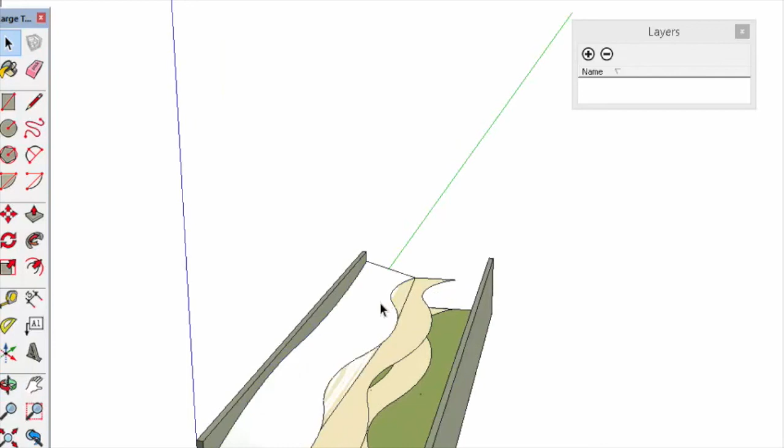It creates the surface in 3D, and I can adjust that and clean it up because it does a 1-for-1 on all the vertices. So wherever the arc is flat, it's minor cleanup, and then you're left with curving terrain. You just paint it.

But let's back up and let's slope the walk, because obviously the world's not flat. So let's go ahead and give this an incline to the sidewalk.

Now we'll do the same thing and select those surfaces, those edges, and ask SketchUp to give us the terrain between them. Now we actually have an approximation in 3D of that site, and it took us a matter of minutes to generate it.

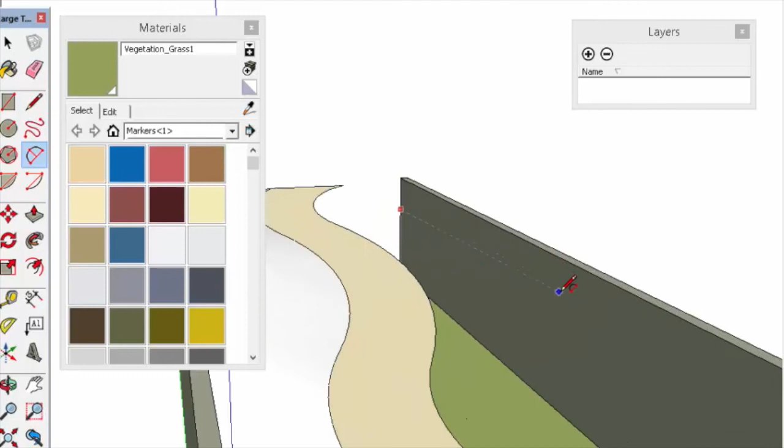We can do the same thing, and we'll draw another set of arcs on the other wall. You're the designer, so you design it however you want. But you select those and ask SketchUp to give you the surface between, and then paint it on there.

Now as we go in and drop our trees and stuff on there, you're actually immersed in that 3D environment, and that's very quick and easy. So that's essentially how this was done with the hand-drawn example.

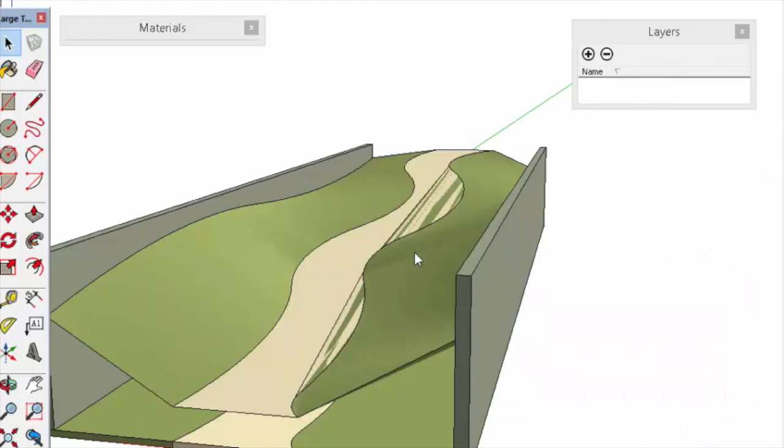So I took and drew along all those walkways you saw when we talked about doing the sidewalk or the hardscapes first, then you draw along the edge of these walls the profile you want to work your way up the hill, and work your way out - I went to 0 on the side, but if you knew what the neighbor's lot was, you would use those as the place to merge to, and it would walk all the way down.

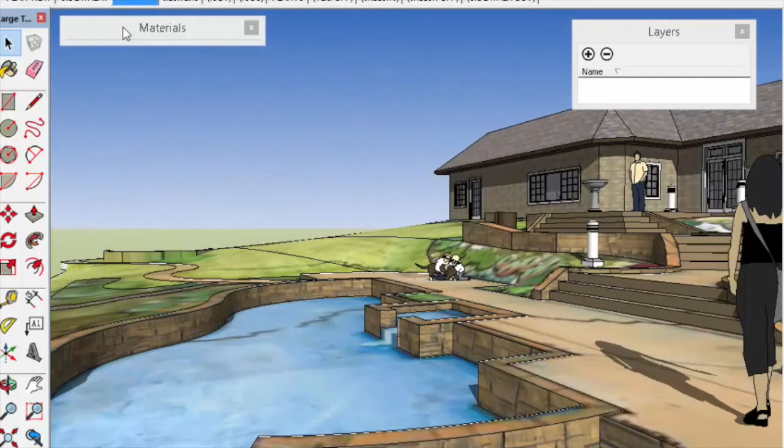So you can actually fully experience this site with the client, and you can adjust the yard as you need to. Again, I made all this up, but I think this is probably what it must have looked like. So once you have it all in place, you add the plants.

And since shadows are on, it'll take a second, but you end up with a really nice communication tool with some DynaSCAPE plant, some hand-drawn, some SketchUp generated geometry. You put it in a bag, shake it all up, put a background of clouds, and you end up with your presentation.

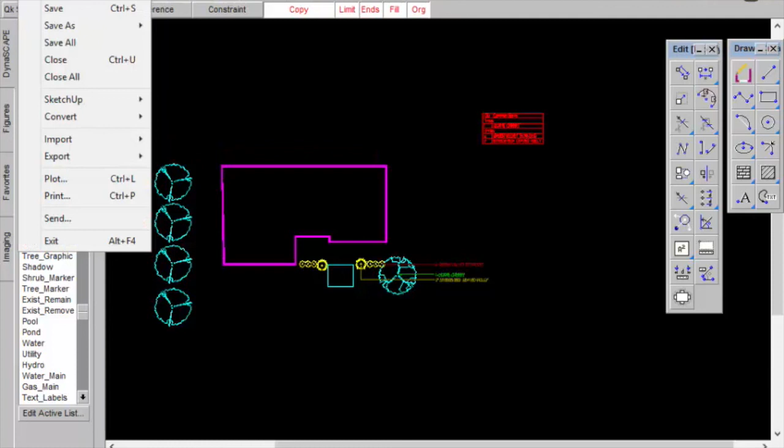File, Save As, Adobe PDF. Then it's going to say, okay, where do you want to put the drawing? Let's put it on that. Print test, save. Now it's going to say what size. I'm going to say landscape orientation, 24 by 36. Click OK, it'll generate the PDF.

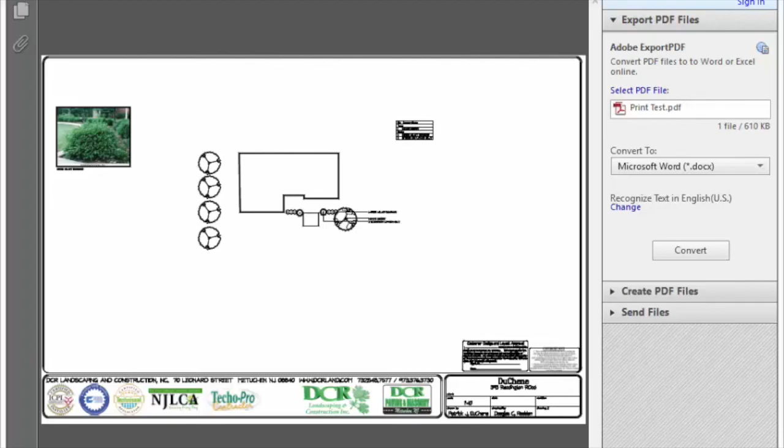And then I'll just go to the desktop. It's coming. There's my drawing. So whenever you save a drawing, it's going to ask you what size you want to save that sheet to. I could have saved that to an 8.5 by 11 and really reduced it, but that's up to you as far as how small you want this to be able to reduce. Did I answer your question?

Which was the layer button? So the layer, if you hover over it, it looks like layers of paper, display the drawing list. So you just double click it, and there's all your layers. You can do the same thing like CAD. I can go shut things down, I can turn them on and off as much as I want. So when I bring in a CAD file, the first thing I'll do is get rid of all the toilets and all that stuff that I don't need, and just work with the building footprint, the topos, and property line. Okay.

You had made a comment on the advantage of using it in conjunction with an iPad. Knowing that DynaSCAPE is not a Mac-based program, how would that work? Easily. You just copy the link onto your... if you're going to use Chrome, well no, they use Safari. You just put that shortcut right on your iPad, and you log in just like you would on your computer. It's cloud-based. I've done estimates on my phone before. It's pretty slick.

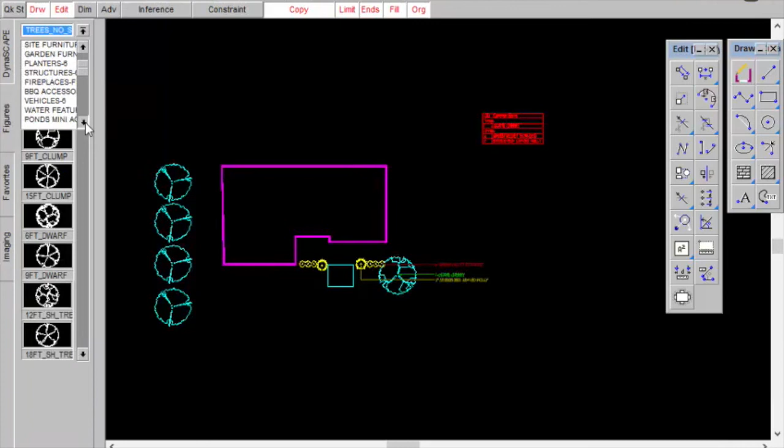You can, I mean that's a matter of drafting. There are some preset construction documents in here, details for like deciduous trees, if you want to throw one of those on your drawing. There are some that Unilock has supplied. You can always go in and override that and make it say Techo-Bloc or whatever. So there is a selection of them that you can put, or you can draw them.

Yeah, you can explode them, play around with them, and then just resave them and save them as a figure. You know, you can create your own figures also. So if you use Eldorado kitchen modules and you want to have all those modules saved so you can just lock them in place in a design, you can save those too. So you could essentially have somebody draw details as you want them, save them as figures, and then install those on all your users' computers, and then everybody's using the same figures also.